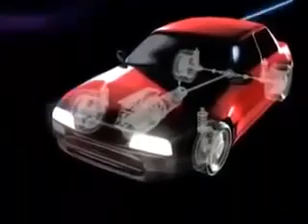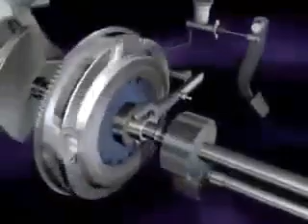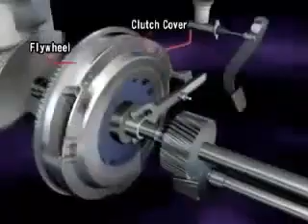The clutch is a mechanism that smoothly transmits and cuts off engine power to the transmission by engaging and disengaging. The clutch cover and flywheel always revolve together with the engine. When the clutch cover pushes the clutch disc against the flywheel, engine torque is transmitted to the transmission.

When the driver steps on the clutch pedal, it releases the pressure plate that was pressing the clutch disc against the flywheel, disengaging the clutch disc. In this state, engine torque is not transmitted to the transmission.

The clearance between the clutch disc and pressure plate when disengaged is approximately 1 millimeter for passenger cars and light commercial vehicles, and 1.5 millimeter for medium and heavy commercial vehicles. This engagement and disengagement is the basic principle of a manual clutch.

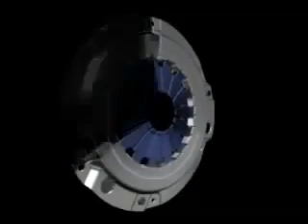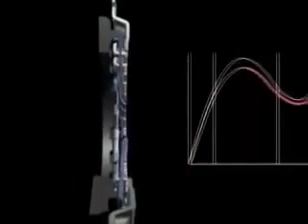The clutch cover's diaphragm spring is a disc-shaped spring that presses against the pressure plate and controls the amount of pressure applied. The amount of force that presses on the diaphragm spring is called the compression force. The graph that shows this change in compression force is known as the clamping load characteristic.

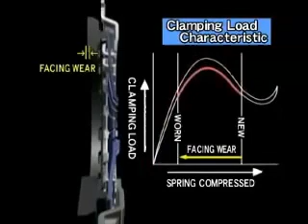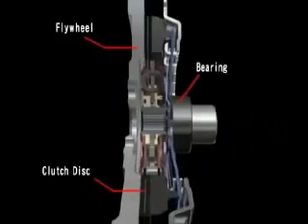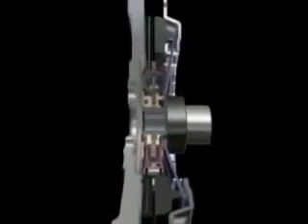The other parts that comprise the clutch cover assembly are wire rings that serve as the fulcrums for operation of the diaphragm spring, strap plates that secure the pressure plate, and the clutch cover itself, which contains all of these parts.

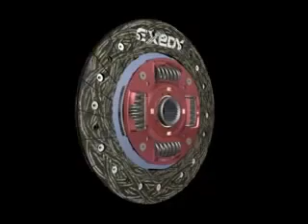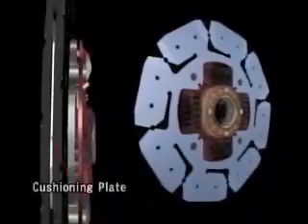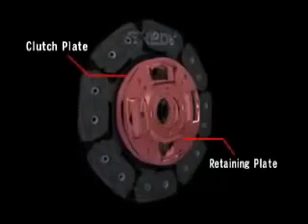Next, looking at the clutch disc assembly, engine torque is first transmitted from the pressure plate to the facing material. This facing material is supported by the cushioning plate, which makes half-engaged clutch control possible. Engine torque is transmitted to the retaining plate and clutch plate, which hold the entire assembly together while actuating the torsion springs.

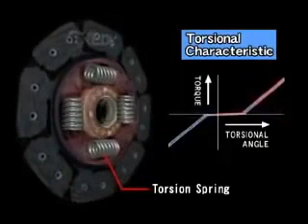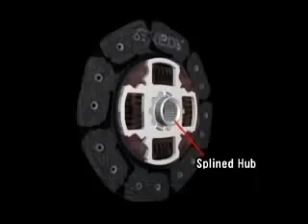The primary function of the torsion springs is to absorb fluctuations in engine revolution. Finally, engine torque is transmitted to the transmission via the splined hub.

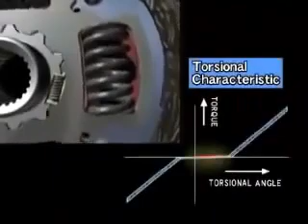Fluctuations in engine revolution while idling are absorbed by this two-piece splined hub, which is coupled with several small dampening springs. It functions to prevent a chattering noise when fluctuations are transmitted to the transmission. The shock from engaging the clutch while accelerating is absorbed by torsion springs like this one.

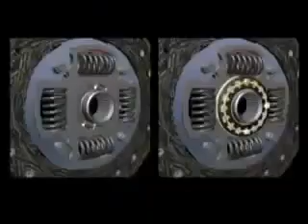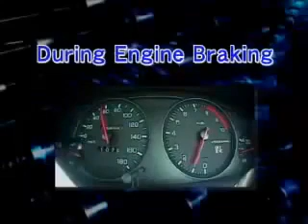The cone springs, friction washers, and friction plate function to quickly stop the torsion springs from vibrating, reducing both noise and vibration. During engine braking, the torsion springs are compressed in the opposite direction compared to when accelerating to absorb the shock of deceleration.

When driving at a constant speed, fluctuations in engine revolution are absorbed by the torsion springs and friction washers. This reduces the amount of chattering noise transmitted to the transmission and the differential gear. Let's take a look at important points to remember when replacing a clutch.

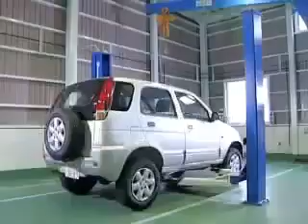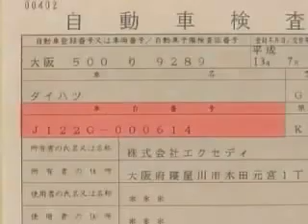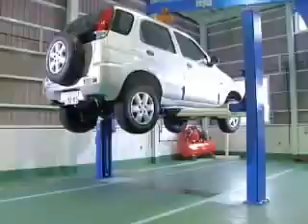When ordering a replacement clutch, it is necessary to check the vehicle's model, the year the vehicle was made, and the type of engine. This will ensure that you order the correct replacement clutch. The clutch is a very delicate component. If the clutch disc is even slightly damaged or deformed by mishandling, it will come into uneven contact with the flywheel or the pressure plate, preventing the engine torque from disengaging.

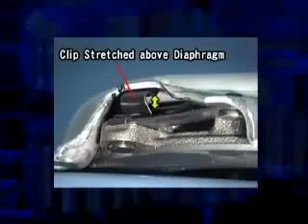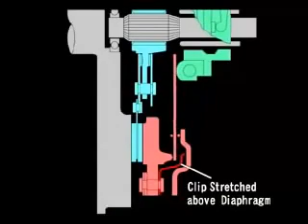The clutch cover must also be handled with care. If it is dropped, the clip could become bent, impairing disengagement performance or causing chattering noise. More severe deformation could shift the position of the dowel holes and make installation impossible.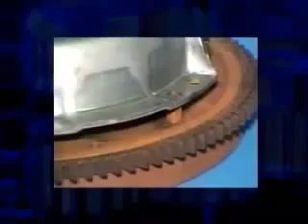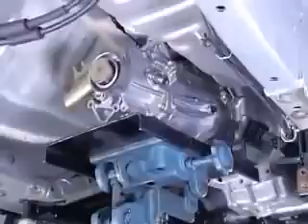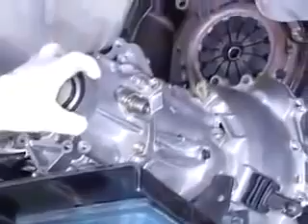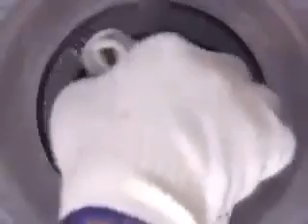After securing the transmission with the transmission jack, pull the transmission off and lower it so that the crankshaft and top shaft are aligned along the same axis. After removing the clutch, confirm that there is no oil leaking from the crankshaft seal, the transmission, the operation cylinder, the master cylinder, or the clutch booster.

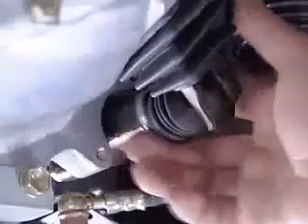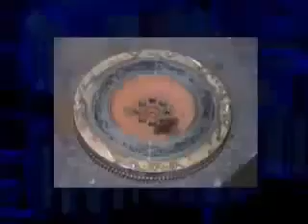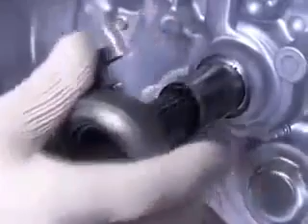Confirm that there is no wear, patterned wear, or thermal distortion of the flywheel surface where it comes into contact with the clutch disc. If any of these problems are seen, replace the flywheel with a new one or repair it by grinding the appropriate surfaces. The release bearing must always be replaced with a new one. Confirm there is no grease leakage or damage and that the bearing turns smoothly.

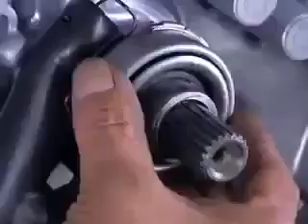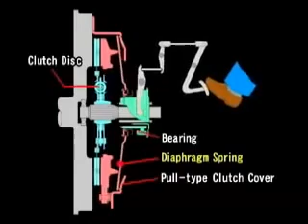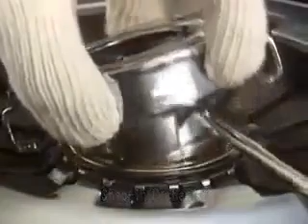Some clutch covers are pull type, and you can disengage the clutch by pulling the diaphragm spring. Exedy pull type clutch covers employ a snap-in mechanism for extremely easy removal and bearing replacement. Finally, confirm there is no end float in the top shaft and check the teeth for wear.